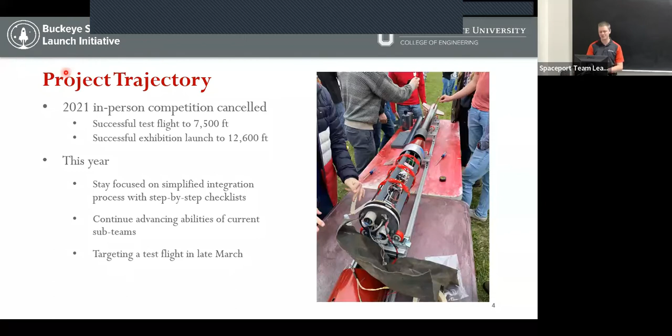By having checklists and being sure we can launch within the first day at the spaceport, we get bonus points if we do so. We want to continue advancing the current abilities of our sub-team, be more technical, continue to level up each year, and get better. We're targeting to have a test flight in late March of this year. Now I'll pass it over to my deputy project manager.

Hi everyone, I'm Zach Parker, the deputy project manager for the Spaceport America Cup team. Again, I want to thank you all for coming tonight. So I'm going to real quick go over an overview of our rocket.

We have 4 main subsystems within our rocket. We have our recovery system, our payload and avionics systems, which are both housed in the integrated systems bay. We have our telemetry, which is linked with the avionics system, and then our propulsion section and propulsion system. We also have our structures team, which holds everything together, and our aerodynamics team to run simulations for us.

So a few parameters for us: we have a wet weight of 64 pounds, a length of about 10 feet, a stability of 1.56, and our open rocket simulations project an apogee of 29,282 feet out of our 30,000 foot goal. We have a rail departure velocity of 92.6 feet per second, a maximum velocity of 1,898 feet per second, and an estimated flight time of 6 minutes and 36 seconds.

So the way the CDR is going to work: each sub-team will present their purpose, an overview of their system, a breakdown of their system, their testing and validation, some risk identification and mitigation, as well as their upcoming spring schedule.

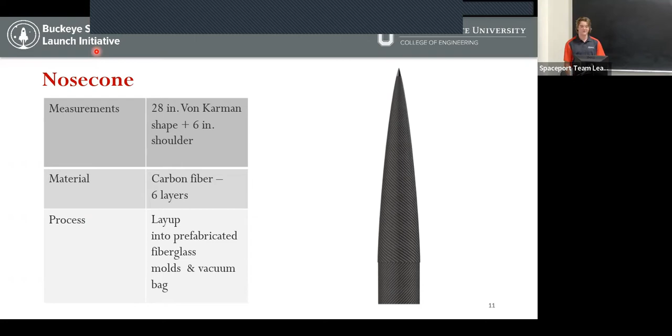To go more in depth, our nose cone is made of 6 layers of carbon fiber. It is 28 inches in length and is in a von Karman shape. It has a 6-inch shoulder that goes into the body tube, and this is made by laying up into a fabricated fiberglass mold. This is prefabricated because we're using the 2018-2019 mold. This mold has proved effective in the past, and we haven't changed our nose cone design, so we have the liberty to use it again. We vacuum bag this, and that's how we make this part.

Similarly, our body tube has 6 layers of carbon fiber. It is 36 inches in length and 6 inches in diameter. Again, it has that 6-inch shoulder where it interfaces with the nose cone. We lay this up onto an aluminum mandrel and wrap it in shrink tape.

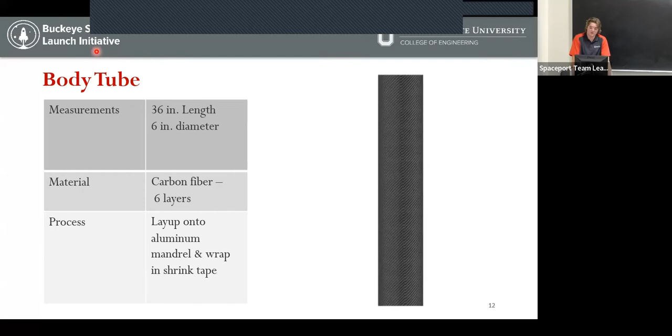Then we have our transition piece. This is 16 inches in length. It is the aerodynamic transition from the 6-inch diameter to the 4-inch diameter. It's made of fiberglass and is only 4 layers. The transition is used for the antennas because fiberglass doesn't interfere with the waves as much as carbon fiber does. It's only 4 layers because it's not an actual structural piece, it's only there for aerodynamic purposes, so it doesn't bear any load. So we have the ability to make it fewer layers, it weighs less, and it doesn't need to be as strong.

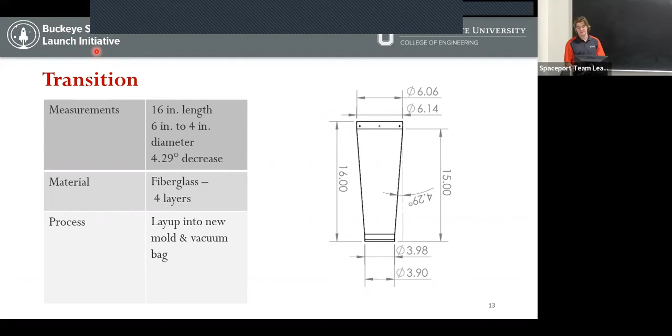We lay this up into a mold much like the nose cone, but this year we're making a new mold for this. Our transition piece underwent some changes, and you'll hear more about those changes and how we came to find those with aerodynamics next. We vacuum bag this much like the nose cone.

Then we have our coupler. Our coupler is made of aluminum. It's 10 inches long, with a 6-inch diameter to 4-inch diameter. This is teamed up with the transition. This is the hard transition, which is what changes the loads from the 6-inch diameter to the 4-inch diameter. This is made of 2 aluminum tubes, welded together with the base plate. We're getting this welded together externally through OSU machining, so this is in progress currently.

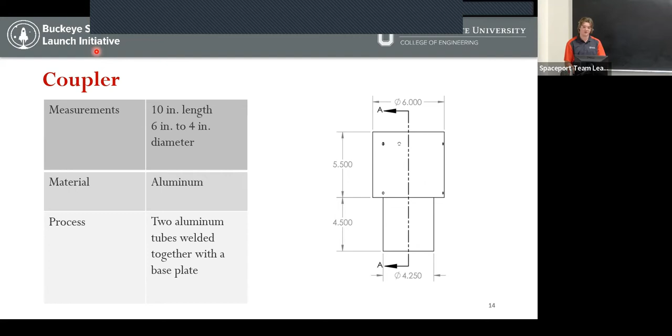The recovery bulkhead is 6 inches in diameter. This goes between the nose cone and the body tube, and this is important because it's there for the purpose of pressurizing the nose cone. This matters because if the nose cone isn't properly pressurized, the firing charges won't blast it off, and it could shoot black powder down into our integrated systems bay, ruining those electronics and ruining our flight, for lack of better terms. It's made of 2 carbon fiber bulkheads and an O-ring. The O-ring is between the two, and when we tighten those bulkheads, it expands, which helps us get the pressure we need. It has the 2 firing charges on top for blasting off the nose cone, and then it has the hardware, including the hook, which hooks onto the parachute.

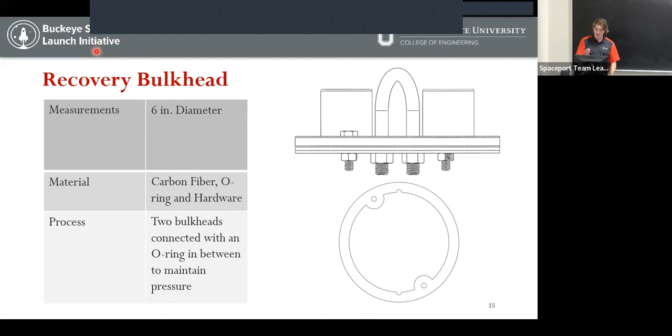The booster tube consists of an inner and outer motor tube as well as fins. We have all of those parts ready, but those will only be used for our test launch, because for our exhibition launch in June, we'll be buying a booster tube.

The nose cone is in progress, one completed, because we started last Wednesday on it. Truth be told, I have never made a nose cone, and no one on my sub team had made one previously. The only person on the team this year who had made a nose cone was Zach.

So we started last Wednesday and made our first nose cone as a team. We got familiar with the process and made a pretty good nose cone. We do want to remake it because there are some things we think we could do better. It'll be far more efficient this time—we'll be faster, and we know what we're doing. So next time we'll make a better nose cone, and that one should be perfectly fine.

On top of that, we have our coupler. As I said, this is external, so we're bringing this in. It's in progress right now.

Then we have our transition piece. This is by far the thing that's going to take the longest, because it's also laid up like the nose cone, so it's just as difficult, but we have yet to make the mold. We have the plug for the mold being milled currently, and then what we're going to do is take that plug and make the mold from it. That should take a week, then make the transition piece from that mold, which should also take a week, give or take.

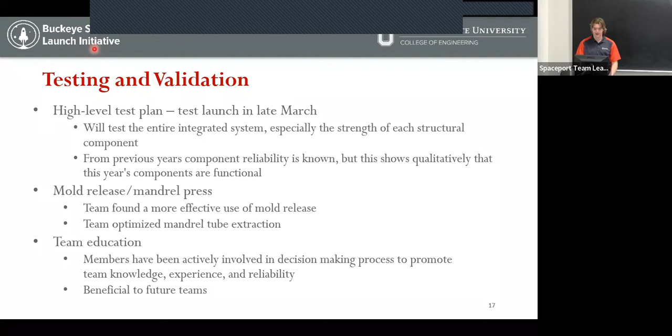This is helping us to quality check throughout the year. And this is obviously going to be beneficial to future teams because we're just going to have a more educated sub-team. So, our risks to our project success.

And then finally, improper integration, not likely. That's our main thing. That one kind of covers all four, all year, especially the last month I show you in our schedule. The last month, we're kind of just making sure to integrate everything really well. It's going to fit together nicely. We're going to integrate with the other sub-teams, and we shouldn't be worried about that.

That being said, for our risk mitigation, we do those quality checks all throughout the year. That covers our composite airframe failure, bulkhead failure, and motor mount failures. As we quality check throughout the year, we're working against any sort of failure in that sense. Our coupler failure, this is welded for strength, so it will be strong enough. The only thing that we have to make sure to do is check that it is parallel and concentric, so the centers line up so that our rocket stands straight.

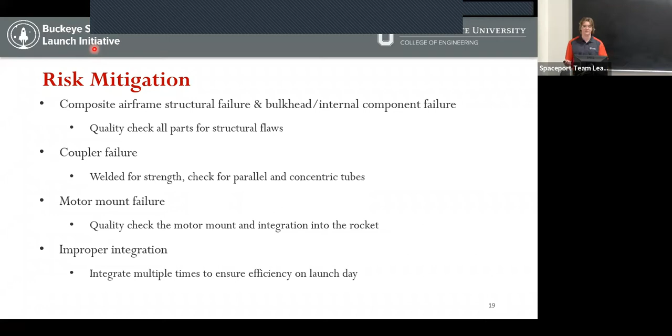As for improper integration, as I said, we spend all year making sure we're going to integrate properly. This is just if we happen to improperly integrate, then it would be an issue. But we do this all throughout the year, and this ensures our efficiency on launch day, as Zach said. We want to be able to do it in the first day, so we'll be quick with it and we'll be familiar.

So this is our schedule. As you can see, week 5 we have our CDR, which is currently happening. Looking forward, next week we're going to be working on our nose cone, making our second one far more efficiently this time. Then week 7, we're going to be working on a transition mold. Our plug will have been milled by then, so we'll be able to make our mold. And then from there, we'll take that mold and make our actual transition.

I imagine after the experience we'll have with the nose cone, we'll be able to make the transition the first time. But obviously we have those last 3 to 4 weeks of free space to finalize those parts, if we have to remake another transition or nose cone, or just need to sand all the pieces up and put them together properly. This is also when we'll integrate with the other sub-teams to get ready for our test flight in week 12, the end of March.

And then after our test flight, we'll mainly spend time looking at what, if anything, went wrong, or if we need to make any additions or fix any of the parts at all. And then also we'll be getting that booster tube that we ordered in and integrating that. So now I can open the floor for any questions you guys have for the structures sub-team.

Yeah, I've got a quick one. You guys haven't talked about fins. Is that considered part of the structure? I take it that's later on, fin structure. Yeah, so that'll go later on. You'll hear about that next from Aerodynamics. Okay, that's fine.

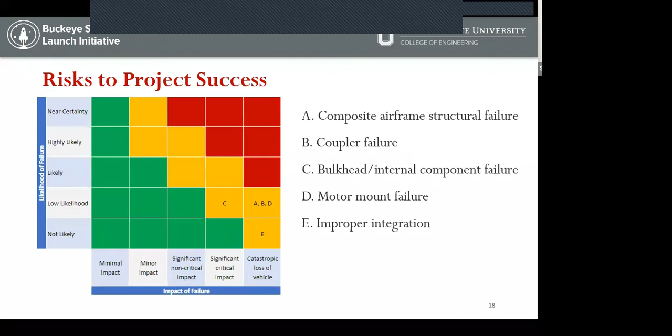Yeah. So if you go back to the coupler, Andy. Sorry, my bad. All right. So I'll use the laser pointer on the screen here. So yeah, it's going to be welded under here. So that's going to be a flat plate. It'll be welded in there. And then this outer joint's a little harder to do, but we can chamfer. So there'll be a plate that goes inside the 6-inch tube. We can put a chamfer on there and then weld it. And we might turn it down just to get some of the bead off if we need to, but we don't actually need that for any aerodynamic reasons or for fitment. So we'll weld those two positions.

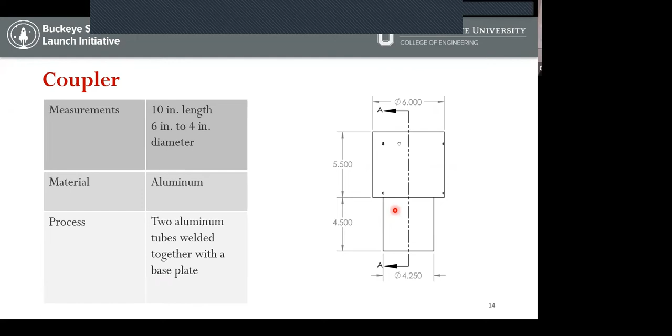Aluminum's tricky to weld. You got to know somebody who can weld. Yep. There is a person over in the physics department that helped us out last year that we're planning to talk to again. If not, BSLI's recently made a connection with the Pipe Fitters Union, which is actually just over on Kinnear Road, right by CDME. Sorry. Yeah. And we could go talk to them as well. All right. Thanks. Yep.

Cool. All right, so if that wraps up questions, then I'm going to pass it on to Aerodynamics.

All right. Hello, everyone. My name is Stephen Morosky. I am a third-year aerospace major here at Ohio State, and I am the aerodynamics sub-team lead.

All right. So what is the aerodynamics main purpose? Our main purpose as a sub-team is to define the rocket's performance through all phases of flight and determine the drag and stability of it. And also, we want to make sure that we give our team members some good hands-on experience on CFD and how it's kind of used in industry and how we can couple that with our aerodynamic knowledge we learn in class.

All right, so the overview of what our sub-team does: again, we get accurate drag estimates for all regimes of flight, not just max Q. We want to recommend geometry changes, as we will show today based on our simulation results. We want to assess the stability throughout all phases of flight and make sure that we're statically stable through all phases. We also want to make sure we gain confidence in our simulations.

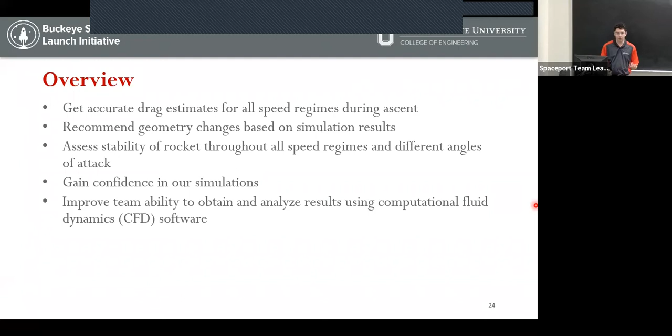This is something we're constantly striving to do, just trying to make sure that what we put into the computer, what we get out of the computer is reliable and that we can really recommend things based off of that. And then once again, we just want to make sure that our team members gain knowledge on how to use CFD and then how to properly analyze results.

All right, our general design process for how we design different parts or how we go about our simulation process is that first, if we're making design changes, we want to try to look up some current literature and see if there's anything out there that we can maybe model our designs after. And then after that, we're going to move into our preliminary 2D axisymmetric runs at max Q. 2D axisymmetric is less computationally intense than 3D, so we just start with that.

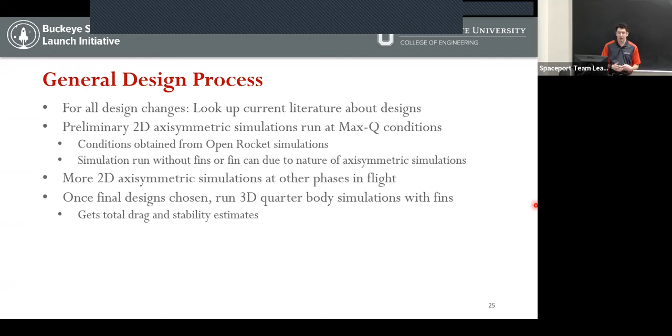And then after we get max Q down, we move on to testing the other regimes of flight. And then once we've decided on a shape from 2D, we're going to import it into 3D and once again, try to run everything through all the different phases of flight.

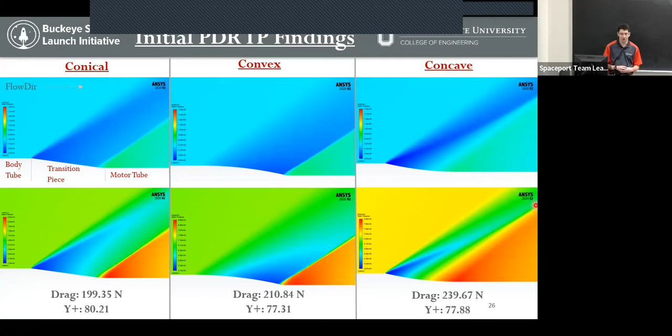All right, so right now we're going to look at the transition piece design. So this is a slide from the PDR, and it shows how we had previously tested conical versus convex versus concave. And really, we didn't see any major drag improvements just by changing the shape of our transition piece. So what we decided to do was increase the length by 2 times, and we saw a significant drag savings. So we decided that that was going to be our variable we were going to investigate.

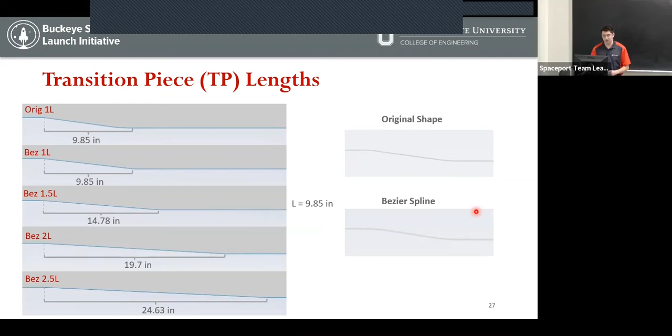All right, so for how we decided these lengths, we have our current length of our transition piece, 1.5 times, 2 and 2.5 times our current length. One thing we also did was we changed the shape from our original shape here in the top right, which kind of has these squared off corners, to this Bezier spline, which kind of has a more smooth curve. It might not come out quite perfect in manufacturing, but it's there in the simulations just as an ideal case.

All right, as for how we set up our simulations in Fluent, we use the realizable k-epsilon turbulence model with scalable wall functions, which is targeting a y+ of between 30 and 300. We used a pressure-based solver, and then we used a quadrilateral dominant mesh, but we had to use 2 different meshes for these simulations because for supersonic, we were going to use adaptive mesh refinement, which means that the solver automatically refines the mesh around a parameter we chose. So we chose pressure, so it refines around the shocks.

And then in subsonic, there's not really any variable we wanted to refine around. So we just put a tight box in around the rocket to make sure we got good resolution around there.

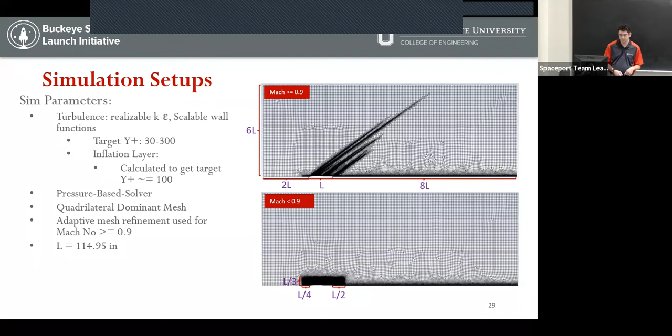All right, one thing I want to mention quickly before we get to the results is that, as I mentioned on the last slide, we commonly refer to this parameter of y+. Really, basically, y+ is this parameter used by our solver to calculate turbulence. And like I said before, it should be between the value of 30 and 300.

But when we used adaptive mesh refinement, along our transition piece, it refined the cells and it made our y+ drop into an unfavorable region where we don't want it. And as you can see, that's on the top here. And on the bottom is without adaptive mesh refinement.

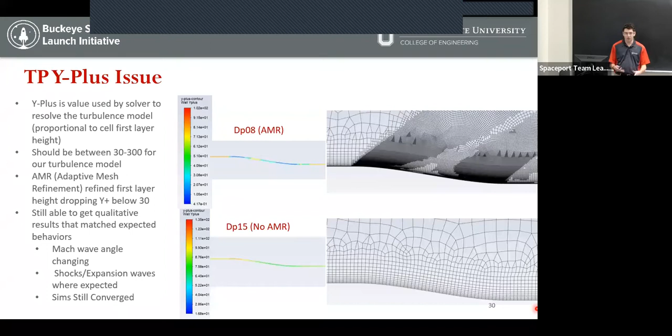But I think despite this, with some of the qualitative and quantitative results I'm going to show you, we still have enough confidence to recommend a geometry change.

All right, so this is our simulation result. These are the max Q contours for our current length, 1.5 times, and 2.5 times our current length. You can see that the shocks came out nice and clear, but with this picture it's kind of hard to see much detail. So we went ahead and I'm going to show you these pressure contours instead.

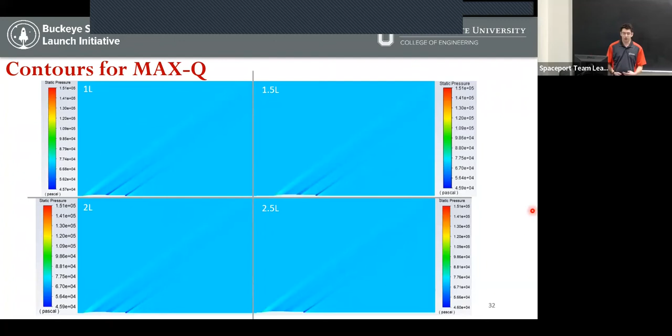One thing I wanted to point out with these pressure contours that was pretty interesting was as you increase the transition piece length, or decrease the angle that it's at, the pressure gradient from free stream to after the expansion wave seems to decrease, which is also something we found when looking up literature is that in theory, as you decrease this angle, that pressure difference should be lower.

So then going back to our design points, like I said, we had 17 different design points for 5 different transition piece shapes. This is all our total drag results plotted out versus time. You can see that as we increase our transition piece shape, it decreases drag pretty significantly. And over here on the coefficient of drag versus Mach number, you can see that the transition piece really has its greatest effect in the supersonic regime.

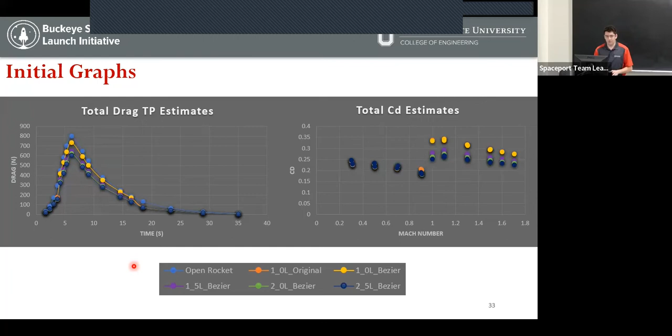One anomaly I'd also like to point out is right here at these two time slots, how they differ kind of oddly from the open rocket prediction. That was right around Mach 0.9 or Mach 1, which is really hard to simulate and get right. So that might be why some of those values are just a little off from open rocket, or it could be that open rocket doesn't predict it right. We're not entirely sure the reasoning.

So then the question is, how are we going to determine which shape is the best? Because obviously if we're increasing our transition piece length, we're adding weight. So we need to figure out how much drag are we saving versus how much weight are we adding. The first thing we did was we integrated all those curves you saw on the last slide, divided them by the total time from liftoff to apogee, and so we get what we call the average drag of each transition piece.

You can see it gets this nice curve here that as we increase the transition piece length, obviously we do get this decrease in average drag. And here at the bottom, it's plotted as the angle of the transition piece versus average drag.

The next thing we had to do was account for the weight. So we weighed our transition piece and found it was around 2 newtons. We set that as our base weight and said if you double our length, we're going to add 2 newtons, so we double the length, we double the weight. Then we added this average drag curve and this weight added curve, and we get this drag plus weight versus transition piece length. As you can see, even as we increase the length, we're going to decrease drag and not add so much weight that we're losing the drag we're saving.

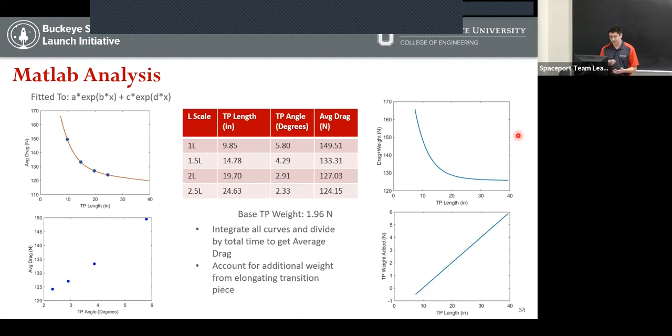So in conclusion for the transition piece design, we decided on 15 inches, or about 1.5 times our original length. This was chosen because it gives us a pretty significant raw drag savings, but it's still short enough that structures knows it's going to be able to manufacture it easily. Also, we never manufactured something longer than what we currently have, so we want to make sure we can do it.

We also didn't want to make it so long that we're going to start disturbing the flow around the fins.

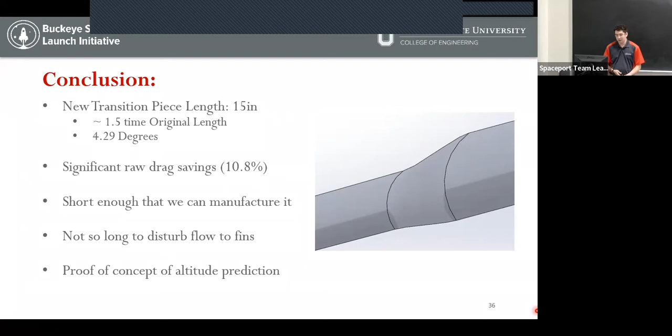But also one really cool thing that was pointed out with the Simulink analysis is that it's kind of a proof of concept that maybe we can work towards making our own altitude predictor from Open Rocket. But that would require 3D sims. And we managed to get some 3D sims in before the CDR.

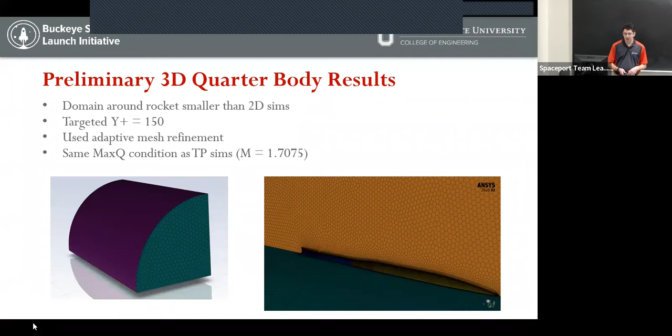So these are our preliminary 3D quarter body results, which means we simulate a quarter body of the rocket, and then assume that this plane on the right and this bottom plane are symmetrical, so the solver just sees that flow as being symmetric across that plane. We did use adaptive mesh refinement, and then we used the same max Q conditions at Mach 1.7 as for the transition piece simulation.

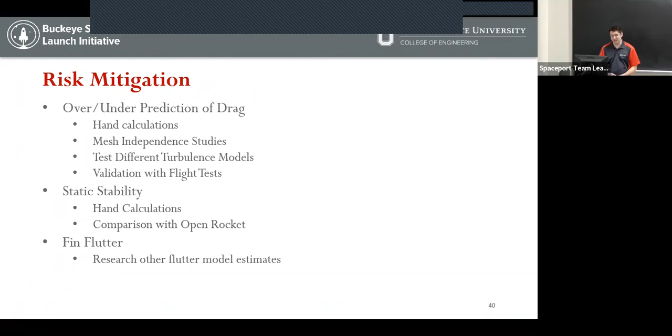And then fin flutter: we use a commercial software that's well accepted in the community, and that is based on a lot of textbooks that know a lot about flutter estimates. But we can always look into other fin flutter estimate models.

All right, so for the schedule: February through March, we're going to keep running 3D sims to try to get sims of the 30K configuration and the test flight configuration, just because they use different fins. We're going to begin trying to develop this altitude predictor, whether it's a plugin into OpenRocket where we can just change the drag values, or if we have to create our own through a Simulink model integration.

We're also going to research trying to run sims with motor exhaust, and then I'll try to do more hand calculations. Then April to May, really finish this altitude predictor, get it ready for competition, make sure that we can hit as close to 30K as possible. And then we're also going to validate our simulations with the test flight, more hand calculations, and then just general prep for competition. All right, any questions?

Steve, John Dilley. Hey, yes. That can be kind of tricky.

I did an analysis about three years ago on base drag and some experimental data from back in the 50s. Do you have that stuff? I'd be interested in meeting with you maybe at one of our meetings, because I did read through it. I was just a little confused about what exactly the conclusion of the analysis was. So maybe we could meet and talk about how exactly we could integrate that with our rocket. Sure, that'd be interesting. That'd be fine. Okay, sounds good.

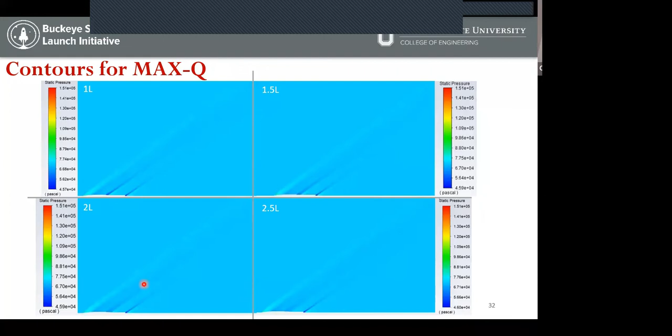So the major input into the altitude predictor is just the drag? Yes, so we include thrust and weight. But the main thing that we're changing, based on OpenRocket, which is the program the team's used for many years now, is that we're going to actually input our own drag data, which we've never done before.

Is that a variable input then? Well, in OpenRocket, there's currently no way to change the coefficient of drag that it uses at each Mach number, but there are some plugins I found online that might let us do that. Also, if we develop our own through Simulink, we can just take whatever drag values we get from our simulations at certain Mach numbers and put that into this predictor, saying between these Mach ranges, use this drag value.

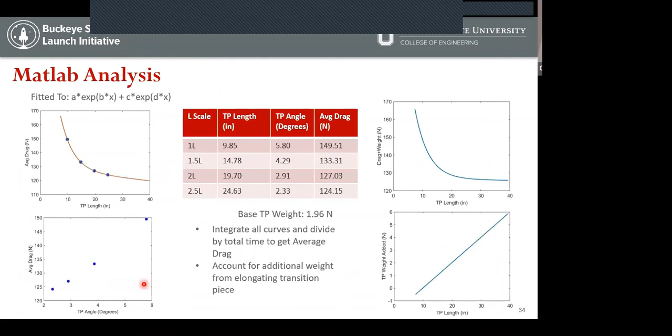Okay, does that answer your question? What you really want is a plot of drag coefficient versus Mach number. That's right, yes. So we could do that. But can you put that into OpenRocket? Well, by default there's no way to input this coefficient of drag versus Mach number. Like I said, I looked about a week ago and found a plugin that might work, but we just haven't had time to test it yet.

Because you could really overshoot your altitude or undershoot it. Right, that's one thing that's really difficult to validate, which is why we're going to use our test flight rocket model to try to figure out how our altitude predictor is actually predicting our altitude, I guess.

I'm certainly no rocket expert. Your inputs are drag, thrust, and what else? Weight, of course - weight, right, thrust. Yes, pretty well. We work with our propulsion team, they'll do a static fire of the motor we'll be using at competition, and then we'll take that static fire data and plug that straight into the simulation.

So it's all about drag. Yes, right - so at the end of the day, the only variable thing that could change the altitude really comes down to drag and angle of attack, if we add that in the future. Yeah, okay, thanks. Yes, no problem.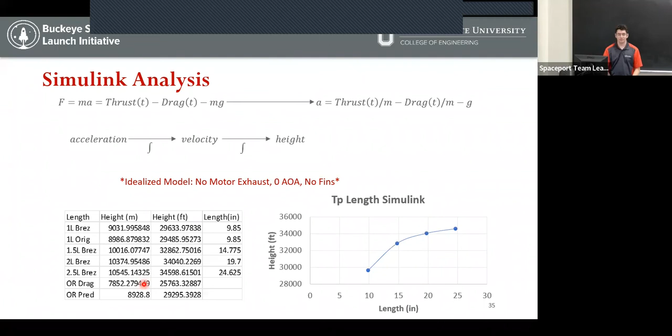All right, any other questions? All right, next up will be avionics.

Hello, everyone. My name is Joe Heiser, and I'm the avionics subteam lead.

Our project purpose is to design and build a high reliability avionics system to control critical functions of the rocket and to collect telemetry to safely recover the rocket and analyze the flight. Another one of our goals is to educate team members in electronics design, software development, and system integration to be able to produce a robust avionics subsystem.

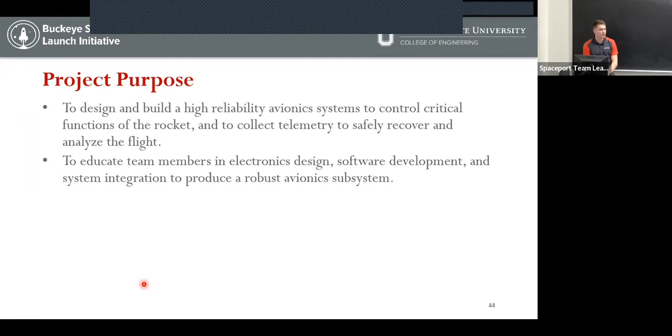Some of the requirements of the avionics team are to deploy the drogue and main parachutes at the correct altitudes, record and transmit flight data, safely arm and disarm the rocket, and track the rocket for recovery.

Starting with the system overview of the bay structure itself, on the left you see a CAD model of our avionics bay. It's a 2U Cubesat form factor. We have a modular board design, so there's a backplane on the bottom, and the boards slot in with wedge locks and are locked in place to the aluminum structure of the bay. The rails and those 3 bulkheads are all made out of aluminum.

On the right side you see a prototype. Those aluminum rails are the final versions, and the backplane you see is also the final version. But those red plastic pieces are going to be milled out of aluminum. They actually are milled already, they just need some holes tapped, and then they are complete.

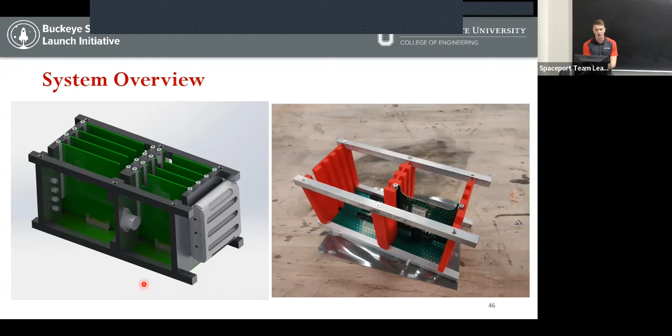So I'm going to talk about some of our boards in the rocket, starting with the power board. The power board supplies power to all of the other modules on the rocket, and also regulates our battery voltage down to voltages that the other boards can use.

We have about a 38 watt-hour lithium ion, 4-cell lithium ion battery. That gives us greater than 10-hour battery life at full power modes, with our telemetry transmitter transmitting at high power mode - that's the most power we'll draw, and that's over 10 hours of battery life. In low power mode, we have over 50 hours of battery life. That gives us plenty of time for integrating - if integration takes a long time and we're out on the pad for a long time, we have no risk of running out of battery.

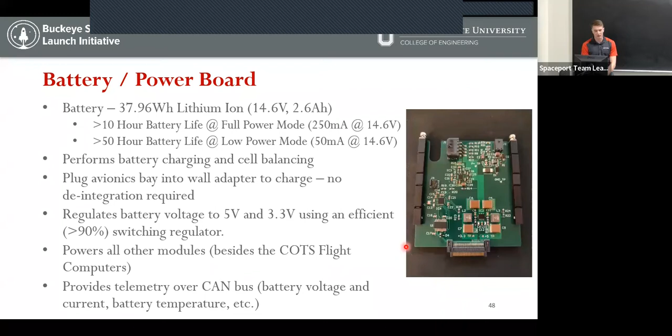And finally, it provides telemetry over the CAN bus, which is something all of the modules do. We're able to send information like battery voltage and current, battery temperature, and the voltage and current of our 5 and 3.3 volt rails, and things like that. That's all sent to the ground so we can monitor the health of the rocket and the battery.

So next, we're going to talk about our commercial flight computers. These are two commercial flight computers we've used in the past. They deploy the drogue parachute at apogee and the main parachute at 1,000 feet. These are reliable, and we've used them in the past and it's always worked well. They act completely redundantly from each other, so we have full redundancy all the way through.

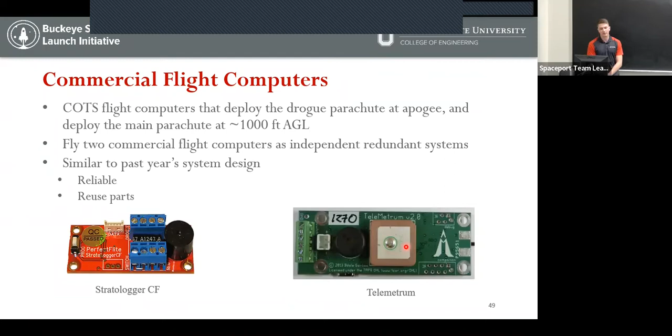The arming boards are what controls power to the commercial flight computers that I just mentioned. The arming boards each have their own commercial flight computer and their own battery, and a redundant connection to redundant recovery charges. So it's redundant all the way through.

We're using a latching relay to control power to the commercial flight computers. This allows us, if there's a power loss on the control side of the relay, the state is saved. So if we arm the flight computer and we lose power for some reason, like the main battery dies, the state will be saved and it'll stay armed. Or if we have the flight computer disarmed, it'll stay disarmed if anything else happens on the rocket.

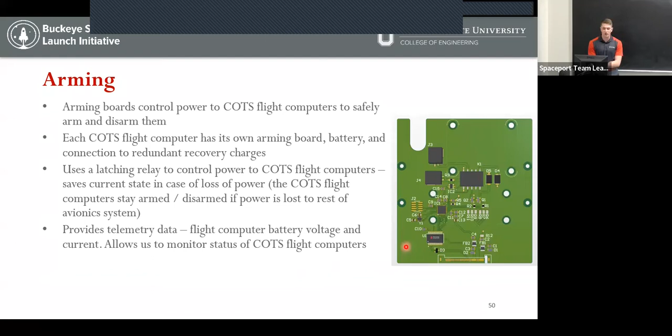These relays are rated to 50 Gs for shock and vibration, so they'll be able to withstand the environment in rocket flight. And again, like all the other boards, this provides telemetry data, so we'll be able to read the flight computer battery voltage and current to monitor the status of the commercial flight computers.

It plays a passive role for research and development and for our high-speed telemetry. So it has no authority to control recovery charges. That's all left up to the commercial flight computers.

We use Ball Aerospace Cosmos to receive telemetry and send commands. That's used in a lot of satellites in the industry, and it's typical for command and control of aerospace systems like this.

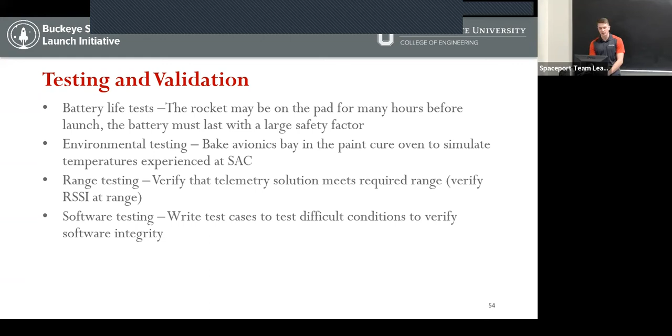So now some risks to project success. A single flight computer failure would be a significant but non-critical impact. If one flight computer fails, we still have the completely other redundant system with redundant recovery charges. Dual flight computer failure would be a catastrophic loss of vehicle. That's a big failure. Obviously, if both computers fail, we can't fire the recovery charges.

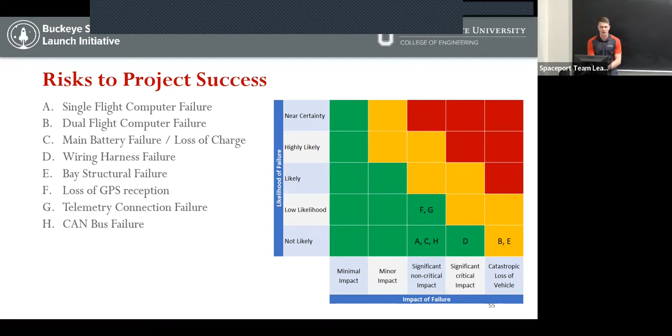So risk mitigation, kind of talked about this when I was just talking about the risks, but single/dual flight computer failure, we have, again, the redundant computers for that reason. Main battery failure, the battery is very much overspecified for the runtime, and loss of main battery does not affect the status of the commercial flight computers. Wiring harness failure, this year we're doing no wire-to-wire splices in the wiring harness. So we're basically just crimping connector pins directly to the ends of the wires, so there's no soldering of wires to other wires. Our connectors are all automotive rated, high heat, high vibration, so they're rated for the operating environment that we'll be in.

Bay structure failure, again, it's really unlikely. The bay is completely aluminum with stainless steel fasteners. It's really rigid and designed to contain the boards in a high vibration environment. Loss of GPS reception, again, I mentioned we have a high gain GPS antenna and redundant GPS sources. Telemetry connection failure, again, redundant telemetry sources on different frequencies. And finally, the CAN bus failure, as I mentioned, we have the ability to arm and disarm the commercial flight computers over the backplane without the CAN bus.

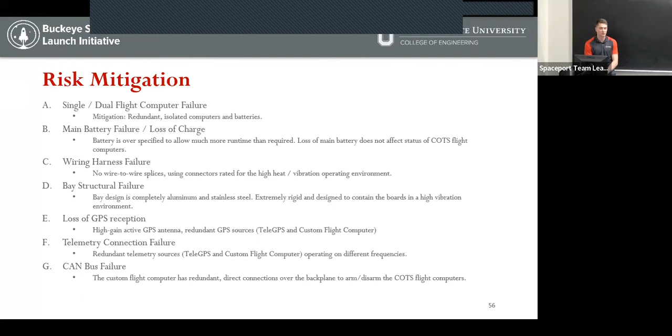I have a question. Yeah. So I'm a little concerned about your choice of latching relays. I like that they're 50G shock and vibe rated, but the team previously used some solid state relays. I think they were MOSFETs for this task, and so switching to a mechanical device kind of feels like a step backwards. So I was wondering if you could talk about the choice there.

Yeah. So mainly the choice was for loss of power on, I guess, the switching side of the relay, because I believe with our previous MOSFET solution, there had to be a signal from the microcontroller to have that MOSFET switched on. So if, say, the main avionics bay battery failed or something, and the microcontrollers could no longer send that on signal to the MOSFET, then the flight computer would turn off. Yeah, I'm sorry, that's actually incorrect.

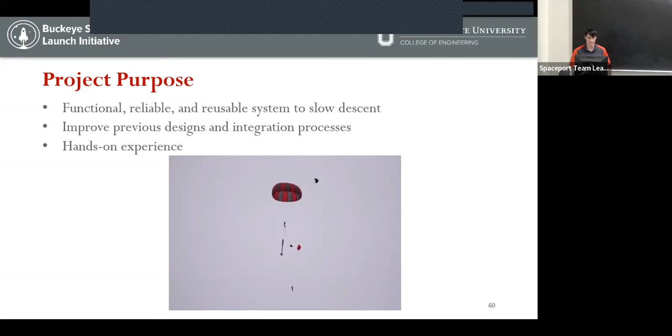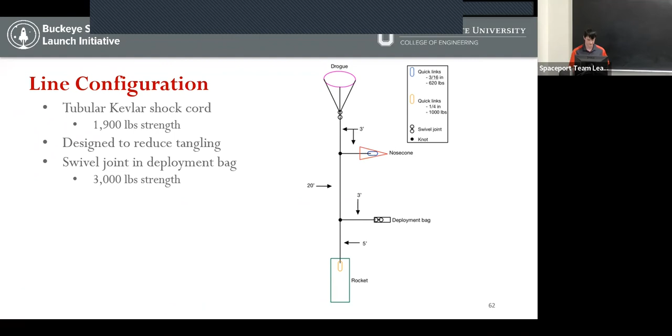As for fabrication of this chute, we're going to be using a French felled seam to hold all the gores together. And this seam is going to be stronger than the actual nylon itself. We're going to be using fabric tape to hold those seams together as we move the gores to the sewing machine and put them through it. This is to make sure we have a nice tight seam connecting all of our gores and a strong parachute.

And then finally, as we're going through the sewing machine, we're going to be using a double needle, which is going to help increase efficiency and speed up the build process so that we are ready in time for the launch.

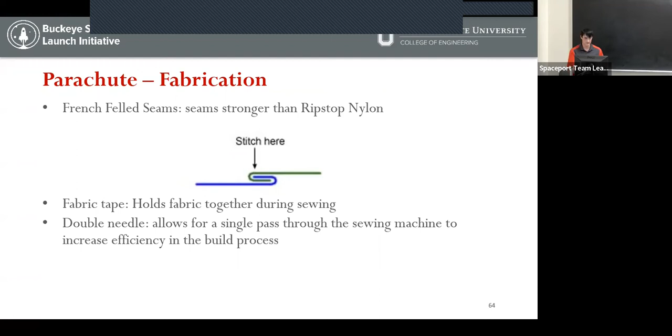For our deployment bag, we are also using a Rocketman Parachutes deployment bag. We're going to be using their bag that has the pilot chute sewn into the deployment bag itself. It is a square chute. We are going to be getting one that is 16 inches across, and this is to make sure that our parachute is going to be compatible with our deployment bag.

The purpose of the deployment bag is to hold the main parachute inside before we want it to release, so before we're under main. It also is made of Kevlar, so it's going to provide an extra layer of protection from the ejection charge blast of our main parachute, so we don't make any damages and have a nominal recovery.

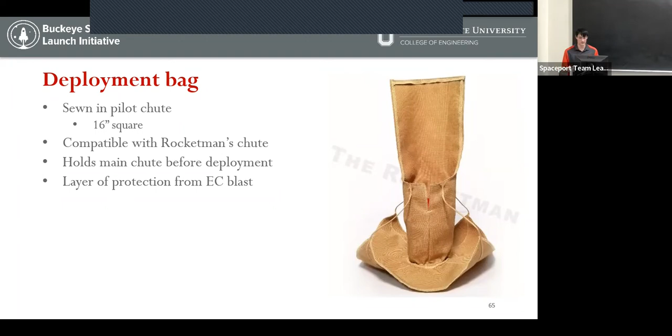As for our ejection charges, we use 2 separate ejection charges independently wired from the separate flight computers that we employ.

We are going to be using this year the ejection canisters that we get from Rocketman Parachutes. They're going to be affixed to the recovery bulkhead using the screw provided, as well as epoxy to hold it in and make sure it doesn't come loose off of the recovery bulkhead during flight.

Our primary ejection charges are going to be made using 4F black powder. Our primary charge is going to have 4.5 grams of black powder, and our backup is going to have slightly more at 5.3 grams of black powder.

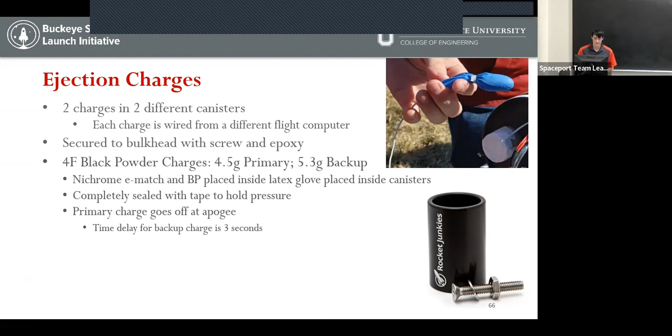Our primary ejection charge is going to go off right at apogee. As Joe mentioned with the barometer, Avionics is going to give us that signal to blow the ejection charges. And then we're going to have a 3-second time delay on our backup charge.

As for testing and validation of our system, we will be doing ejection testing prior to any launches to make sure that we have enough black powder to blow off the nose cone, and also that all of our systems for the ejection are working properly. This is going to be a ground test about a week before the test flight. A successful ejection charge test will end with breaking our shear pins and ejecting the nose cone.

And then we also are going to use the test flight as a test of the full recovery system, making sure that we can recover the rocket fully. A successful launch would end with the rocket landing back on the ground with minimal damage, being able to be flown again, just with a new motor.

The risks to our project success fall into three main categories. The first one being with our ejection charges: we could have a loss of power to one or both of our ejection charges. If we were to just lose power to one of our charges, that would be a minimal impact to our project because that is our loss of redundancy. We still could have a nominal recovery, but we would lose that redundancy there. This is a low likelihood of happening.

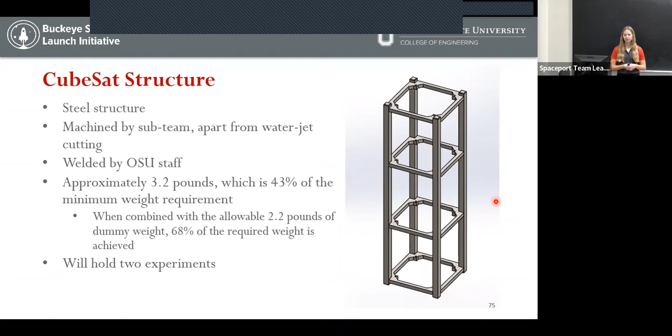So the first part of the yeast experiment, we will be testing 1 or 2 strands of yeast. These were both recommended to me by an OSU microbiology professor. The first of which is Candida albicans, which is a normal resident of the human gastrointestinal tract. And the second of which is Saccharomyces cerevisiae, otherwise known as brewer's yeast. These both can survive in pretty similar environments.

This box will be created by coating a 3D print with epoxy in order to seal the holes that would otherwise be in the plastic, since we do want it to be airtight. And we will then seal between these two parts here using a rubber seal, and then latch it with the latch that is shown, which will again help us create an airtight seal there.

We will then utilize aerogel 6mm insulation, which is a really powerful type of insulation. It's very low density and also very thin, which is very helpful for our small space. And since the box will be airtight, the yeast will be undergoing fermentation and producing CO2, which is something

we'll be measuring along with temperature and pressure data. And then finally, we'll use methylene blue to dye the cells post-flight to test their viability. That viability will then be compared to control samples that we have on the ground, and we will see if there's a difference between how many cells are alive versus dead.

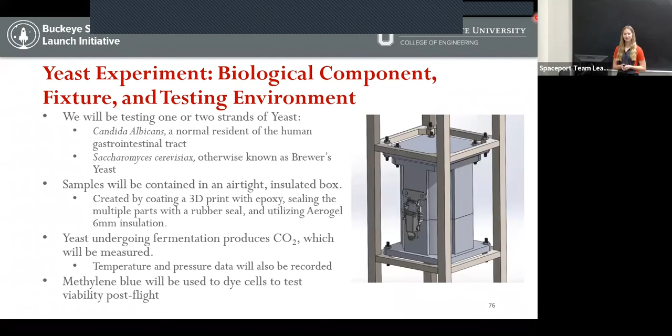As for the electrical component, like I mentioned before, we'll be gathering data on temperature, CO2 output, and pressure. To do this, we'll be using a DHT22 temperature and humidity sensor. This operates from -40 to 176 degrees Fahrenheit, so since the temperatures at launch do get high, this should have no problem measuring those high temperatures.

We will also then use a high precision barometric pressure sensor, and this will be used to ensure that we do have an airtight seal in our box. If the seal is airtight, we should keep the same pressure throughout launch inside of that box.

And then finally, we'll be using an analog CO2 gas sensor. This is highly sensitive to CO2 and less sensitive to alcohol and CO. This is very good for us since during fermentation, yeast actually outputs both CO2 and alcohol, but we are only trying to measure the CO2 output.

For these sensors, we'll be using a Teensy 3.6 as part of our final circuit. This is the same microcontroller that we used last year on the Vibes experiment. But we will be creating a proof of concept using Arduino, as the Teensy has greater accuracy and processing power than an Arduino Uno does. Data will then be logged using an SD card, also very similar to the experiment setup from last year.

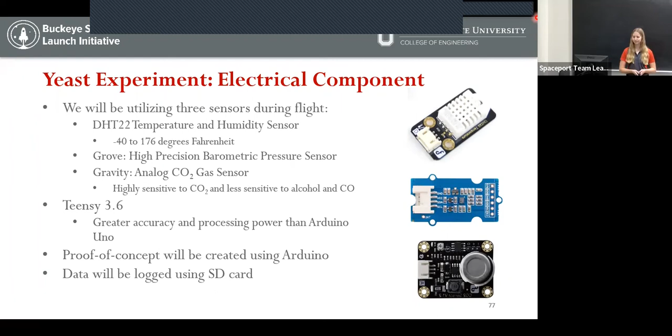Like I said before, we're also outreaching with Metro High School, so we'll be working with students in the mechatronics class at Metro, and they will be designing our second experiment. Essentially we'll be going to their class once a week for 4 weeks, actually starting tomorrow morning, which is pretty exciting.

It'll give the students a chance to use the skills that they've learned relating to both CAD and Arduino to design our second experiment. And then after they design it, we will actually be building it.

As for testing and validation, we will both be pressure testing and temperature testing the fixture that will hold the yeast. Since we are making an airtight box, we have to make sure that the 3D print is able to withstand the pressure difference between the inside of it, which will be ground pressure, and the pressure at 30,000 feet.

To do this testing, we will use the team's vacuum pump to reduce the pressure inside of a testing vessel, which will be something pretty simple, like a box or a frame that then has a vacuum bag over it. Our 3D printed fixture will be inside of this frame.

We will then use a pressure sensor to record the pressure inside of the print, ensuring that the seal is airtight. And we will use the pressure gauge on the vacuum pump to track the pressure inside of the box outside of the print.

As for temperature testing, we will be doing something pretty similar to avionics. We'll be using the oven at the CDME to heat up our insulated print to see how it withstands high temperatures. This is just to ensure that the inside of the printed fixture does not reach the same temperatures as inside of the rocket.

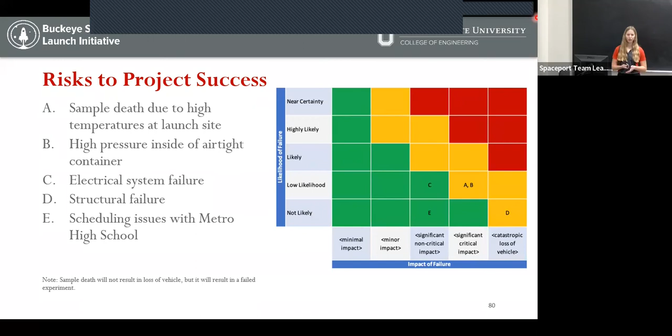I don't expect this to have a super critical impact on our experiment though, because even if we are pushed back, we should still be able to complete something. And if something happens where we can't work with them, we can always create a second experiment on our own or expand our biological experiment.

As for risk mitigation, like I mentioned before, we will be conducting temperature and pressure testing. I explained those pretty well before on a few slides back, but those will both help us see how our 3D print that will hold our samples can hold up to those conditions.

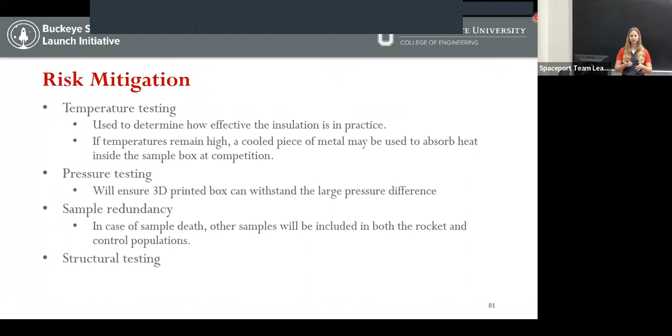We'll also be including sample redundancy in case of sample death. Since yeast is a living thing, we can't control whether it lives or not. We will try to keep it alive the best we can, but we'll include other samples in both the rocket and control populations just in case something happens to one population. And finally, we will test our structure to make sure all the components are secure and won't come out of place during flight.

As for our schedule, now in February we are working on welding the payload bay, which was actually completed today, so that's checked off. We will also be doing outreach at Metro High School, which starts tomorrow morning like I said, so that should be finishing up pretty soon too.

We'll print our fixture to hold our yeast experiment and then coat that in epoxy and get it ready in every way that we can. We'll also be working on our proof of concept electronic sensors, which will be done with the Arduino.

In March, we will conduct our pressure and temperature testing on our fixture, begin the final electrical component that we'll actually use in our launch, and build the design created by the Metro High School students. Then at the end we have our test launch, which gives us a chance to see how we're doing. In April, we'll finish all construction, do some final testing, and make any final design changes to get ready for our competition in June.

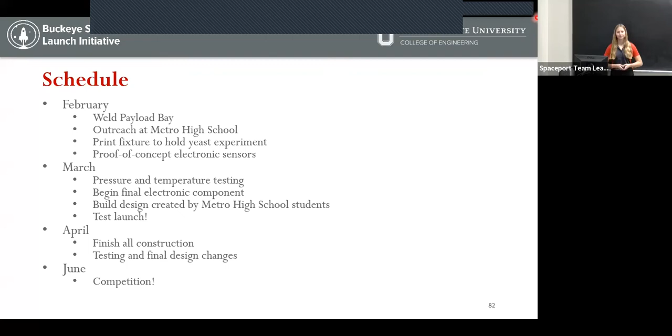Are there any questions for Payload?

Well, I guess what I was leading to is that if it's fermenting and generating CO2, the pressure is going to go up. Think of a champagne bottle. As it generates CO2, it's going to increase the pressure inside, even above atmospheric, if it's a closed container. It's not a fast process, but it does increase the pressure.

Yes, you are right. I guess with that, since rocket flight isn't a super long process, I'm assuming—I know it can be on the pad for a few hours—we were kind of considering that to be something that shouldn't affect the pressure too much.

If it does affect the pressure, that's something that will be measured with our sensor and we should be able to see that. But that does bring up a good point. A couple hours isn't a long time for fermentation, but it is a long time. It's kind of a slow process, but it does produce CO2, which will increase the pressure. We'll look more into that. That's a good point, thank you for bringing that up.

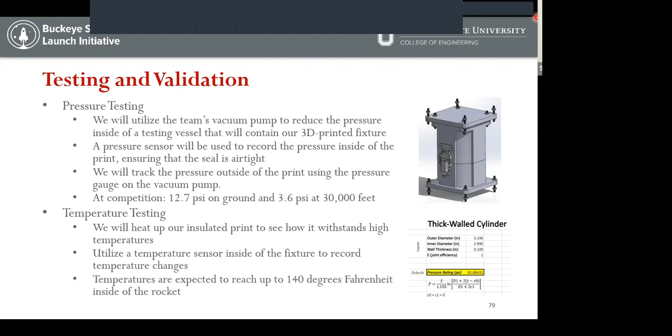Oh, it's the pressure I'd be concerned about. Yeah, actually let me go back a few slides. I didn't really mention this while we were on it, but using an ASME pressure calculator, we found a pressure rating on a cylinder with a wall thickness of 0.1 inches to have a pressure rating of about 61 PSI. So it should be able to withstand the pressure difference, but that's also why we're conducting pressure testing. Okay, good.

Do you mean like a deflection in the 3D print, like that fixture kind of deforming? Yes. So just the natural expansion of the print in the heat, and then making sure that you still have a good contact seal when that occurs. And also, with the consideration that the yeast will build up pressure on the inside of the vessel.

Yeah, we weren't originally planning to temperature test with the yeast inside of the fixture. That is something to consider with the pressure buildup, actually. But I guess we were hoping that doing temperature testing would show us any deformations that would occur. And then we could also pressure test after we do temperature testing, just to make sure that the seal does remain airtight. Maybe we could do those close to one another. That is a good consideration to look into.

It's Joey again. Do you know how quickly the yeast will ferment? I just wanted to ask, because I'm thinking again, going back to that pressure, it shouldn't be much. Well, I guess I should rephrase that. I don't know how much that will be, but I just wanted to ask if there is any knowledge on that. I don't have an exact number for you, honestly.

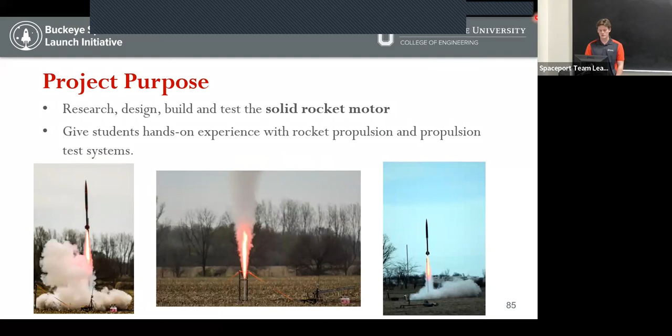All right, hello, everybody. I am Noah, and I am the propulsion lead. The purpose of our project is twofold. It is first to research, design, build, and test the solid rocket motor. Second, it is to give students hands-on experience in the world of rocket propulsion. For our structural components, we have our motor case. This is a 54-inch long aluminum tube with a 98mm outside diameter. This is going to be used to house all of our other propulsion components.

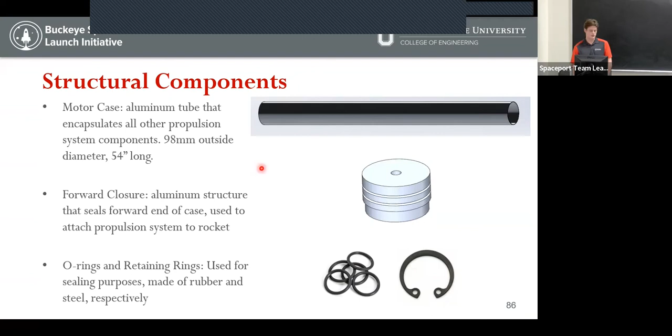Then we have our forward closure, which is also made out of aluminum. This will be used in conjunction with the O-rings you see down here and the retaining ring to seal the forward end of the case so that no hot gases escape into the rest of the rocket. For our propulsion components, we have our nozzle, which is machined out of graphite. This will act as the rear closure to our motor case. For our fuel, we use ammonium perchlorate composite propellant, in the form of solid propellant grains with a tubular grain pattern. As the grain burns outward from this inner circle, our grains will effectively act as the combustion chamber for our rocket.

Here's a better view of our system assembly. In the middle here, we have the motor tube and the liner. And down here, you can see we use an 8-grain motor with O-rings that go on our forward closure and nozzle, both of which are secured in place by 2 snap rings. And this top picture is a translucent view of the full assembly.

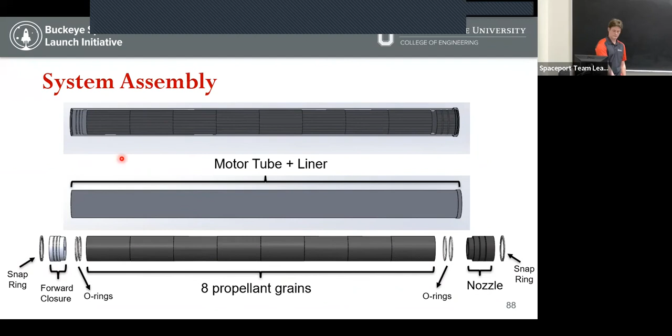For the scope of our project, last year, when we did our full-scale static fire test of last year's motor, the data we received indicated that the motor was burning much hotter than anticipated. So in an effort to improve combustion stability, we have changed our metal fuel from magnesium to aluminum. And we've also decreased the total amount of metal content within the formula to reduce the combustion temperature.

As always, we will be prioritizing motor reliability over altitude goals. We would rather have our rocket get off the ground and miss a few points than not be able to get off the ground and get 0 points.

We will also continue developing our static testing related skills and experience. We do this through 2 different kinds of tests. The first being characterization testing, in which we test subscale models of our motor. And then the next one being full-scale static fire tests of the flight motors, which is just to test our full-scale motor and make sure that everything scales up, the performance of the propellant scales up from the subscale characterization tests.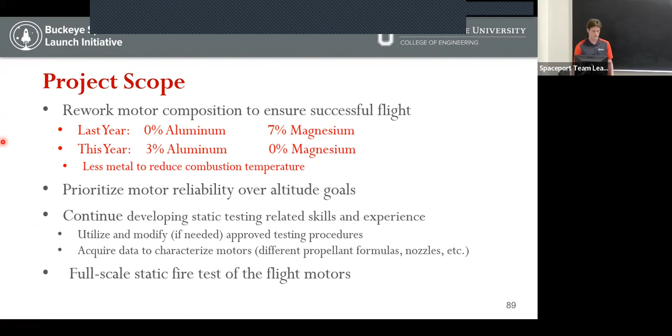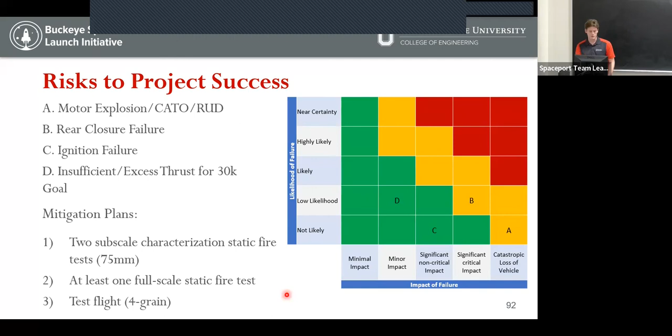And that brings us to our plan for the year. So currently the propulsion team is designing, building, and testing a small-scale rocket nozzle test stand where the rocket nozzles will be removable and replaceable and 3D printed. In early March, we have those subscale characterization tests, again, 2 75mm motors. In the middle of March is our first full-scale flight motor static fire test. This is mainly to establish confidence in the scaling of our propellant formula performance to a larger length to diameter ratio. Then we will have our test flight in late March.

After that, we plan on having a second full-scale flight motor static fire test. This will just be used to test any warranted changes to the propellant formula that we noticed may be necessary after the first full-scale static test. And lastly, we will be traveling to Dayton somewhere between late March and mid-April to learn more about motor casting procedures, because we want to make sure the propulsion lead and everybody on the propulsion team are well-versed and fully informed and participating in the motor construction process.

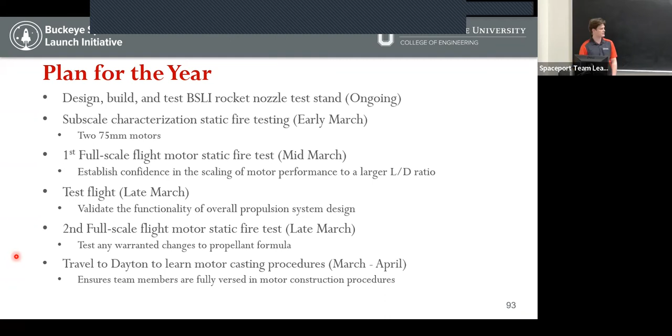Yeah, I had one. You said that the motors were burning too hot. How do you know that? This is from data from our full-scale static fire test that we did last, I want to say November, or it may have been second semester of last year. So what was the result of the motor burning too hot? The result, I'm not really sure what you're asking. Like, did it blow up? No, it did not blow up.

It raised concerns because what we had simulated with BurnSim prior to that test predicted a vastly cooler burn for that temperature and a lower rated average thrust. Yeah, average thrust. So your thrust was above what you thought it would be in the test flight. Yes. Or the test, not test flight. Yeah, in the static test, yes.

Okay. Hey, it's Todd here. I'll help out a little bit. The pressures were so much higher, and pressure goes up, temperature goes up. Hotter is kind of a generic term that we use. The pressures were just getting to the point where we were worried that we're going to have the same problem that we had, I guess, 3 years ago now. We just wanted to get the pressures back down to a more reasonable level.

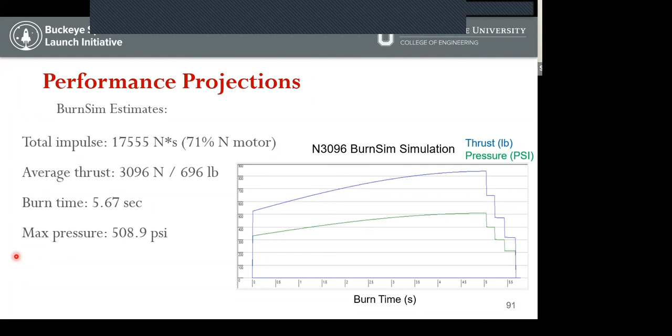Any other questions about propulsion? All right, hand it off to Casey. Yep. Alrighty, so I'm going to go ahead and open the floor up to any questions that anyone might have regarding any sub-team that you want us to go back to. Same as before, anyone feel free to ask, and I'll bring up the correct lead to answer your question.

Well, I just want to say awesome. Good luck to you guys real quick.

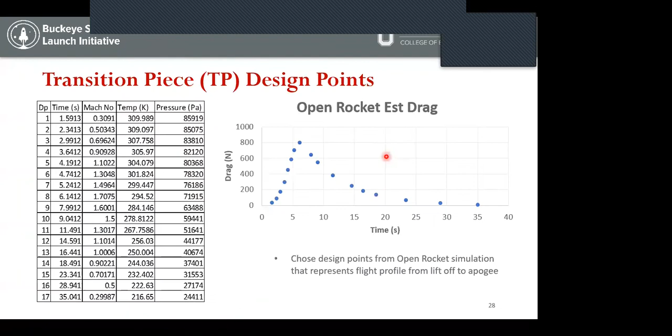I did have two kind of questions. One was for structures. I don't know if I didn't catch it or not. What is transferring the load from the motor to the rest of the assembly? I know there's the coupler in there and the transition. I didn't catch either how they made it or where that force is being transmitted up. Eddie, you want to come over here? Yeah, exactly what you said. The coupler is what's transferring the load between the two, and then the transition is just there for aerodynamic purposes.

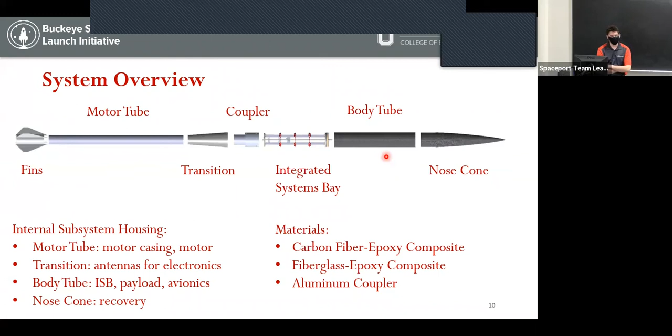Okay, very good. And then the other one was, I know you guys said you did some static stability testing. Have you guys looked into any dynamic stability? As far as mid-flight, I assume that the fins are non-actuated, right, but anything to kind of keep it a bit more stable during flight. No, we haven't looked into any dynamic stability testing. I know that if we get in wind tunnels, we could probably do something like a dynamic stability test. But until we get that capability, I don't know any way to test the dynamic stability. Understood.

I got a question. Yeah, John, go ahead. Casey, are you the system engineer? The system engineer? I guess I would be. Okay, well, so after you do the static firing and you have a flight test, seems like you need to update your parameters to see how high it's going to go. In other words, you got to do an iteration there to update the trajectory based on the latest data you have. Yeah, exactly. Part of my job then is making sure that data gets disseminated from avionics to aerodynamics to ensure that we can cross-check and cross-reference. So yeah, you're exactly right. Okay. Thank you.

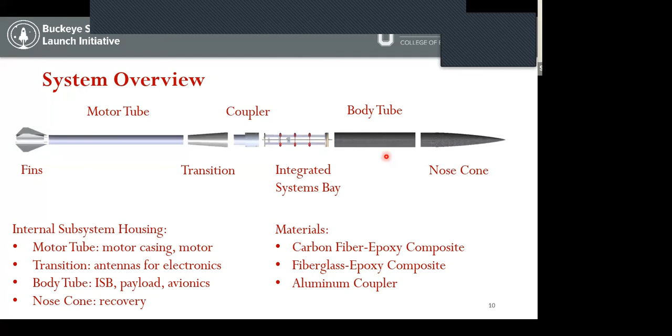Is there a prediction of what altitude you're going to go to? Yeah, you probably said it, and I just forgot because it was so long ago. You're right, yeah, I was back in the beginning.

Our OpenRocket simulation predicts we're going to go 29,282 feet. We're looking to validate and also compare with our aerodynamic simulations that we'll have in the coming weeks. But for now, OpenRocket's pretty standard, whatever one uses, so that's what we're running with right now.

And the goal is to be right at 30,000, right? Yes, there's a scoring equation which is kind of complicated, but the closer we are the more points we get, and we want to win first place. So we want to be as close as possible within reason. We're not going to make sacrifices in our structural integrity or our motor integrity like we may have done in 2019, which caused our downfall that year.

It's a hard number to predict too, with the variables that go into the motor, but also the air in the atmosphere, just predicting that drag accurately. OpenRocket is good, but it's not perfect, so that's part of why we're doing so much work this year with aerodynamics.

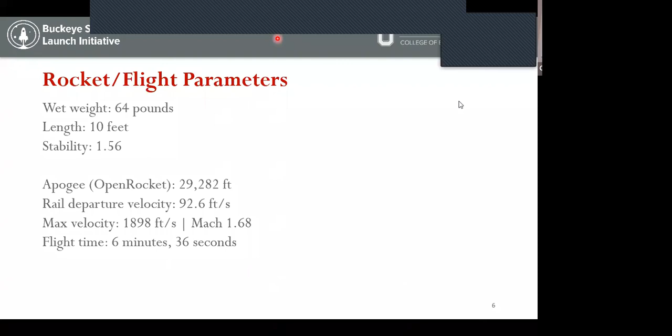Does that answer your question, Craig? Yeah, no, absolutely. I was just thinking about the aerodynamics point of view, and what matters here. I'm not sure if the density and temperature of the air is taken into account during that.

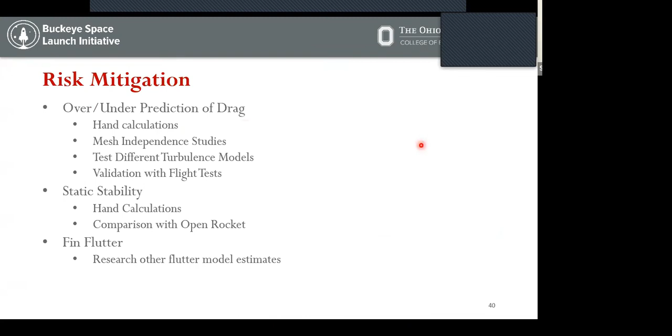Yeah, in our simulations we do model air as an ideal gas, and so we change both the temperature and pressure we're operating at, which, because of the ideal gas equation, effectively changes the density. As for when we build our altitude predictor, whether we'll take the pressure variation into effect, we still have to figure that out. If we go to the coefficient of drag plot that I had... go back and forth, sorry.

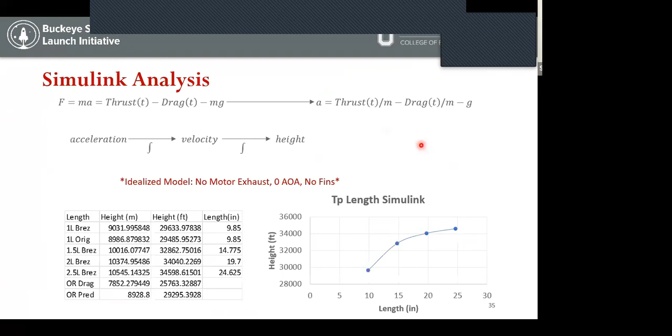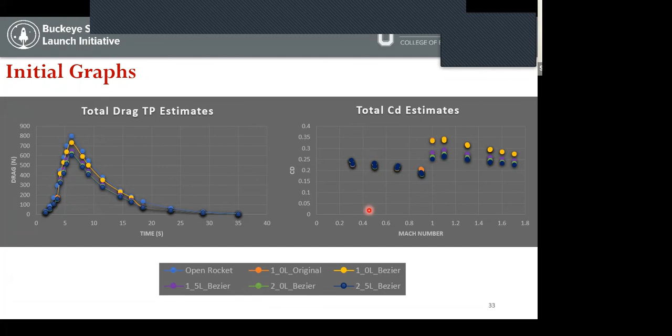Okay. And so we got a question in the chat from Alan, I believe. Do you want me to go back to your slide? Yeah, so I think the question was, what is our target descent velocity?

Under drogue, we're looking at an 80 feet per second descent rate, and then under main, we're looking at 15.5 feet per second.

Other questions? Nick, I saw you unmuted, I'm going to pick on you now. Any questions from anyone? Yeah, I did have one. I wanted to give you guys a chance to make sure you answered that. I guess it's less of a question, more maybe a comment. I know Structures mentioned...

Building or feeling a little bit more confident about the transition piece, I want to relay that if you're making a new mold, that process alone, especially your plug, tends to be one of the hardest things you'll end up doing, because every imperfection you have there will magnify as you go along in that process. So I wanted to express interest in saving time there, make sure you've got a little buffer, because it may end up taking longer.

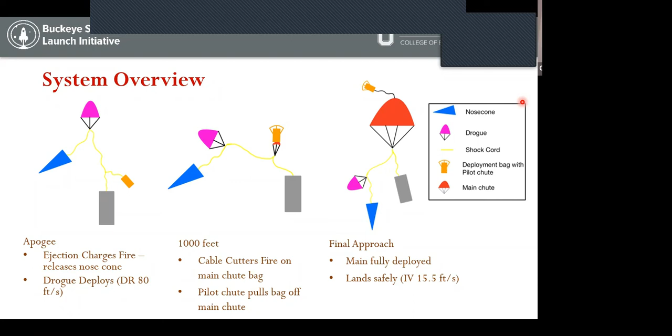Yeah, thank you. One quick question: how much does the rocket weigh when you pick it up off the ground after it comes back down? Mark, I think it's in your slide somewhere, right? I'm not sure, it should be 48.6 pounds as the dry weight. But yeah, just under 50 pounds. So it starts off at 64 and you lose about 20 pounds. Yep, exactly. Okay, thanks.